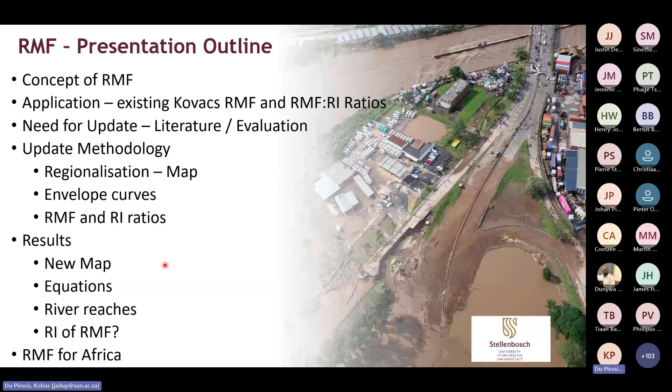So let's start with the intro in terms of the concept. Where does it all come from? The RMF is a realistic estimate of the maximum expected flood peak. Be very sure that you understand that. It is the maximum that you should expect in that region, and there are various regions that we delineated through regionalization. It is an empirical approach, and it's nothing new. It's a method that was developed and introduced by two Frenchmen, Francou and Rodier. They've done it already in the late 60s, where they used 1,200 maximum flood peaks, representing different regions of the world, to test their concept, which we still use today.

Using those maximum flood peaks and the catchments they came from, they developed a family of envelope curves in different hydrologically homogeneous regions, and they plotted these flood peaks against the corresponding catchment areas. They also then made the observation that for catchments larger than typically 100 square kilometers, these regional envelope curves are actually straight lines which converge on a single data point, and that data point represents the total drained land surface area. And in terms of the flow, it relates to the mean annual discharge of the earth.

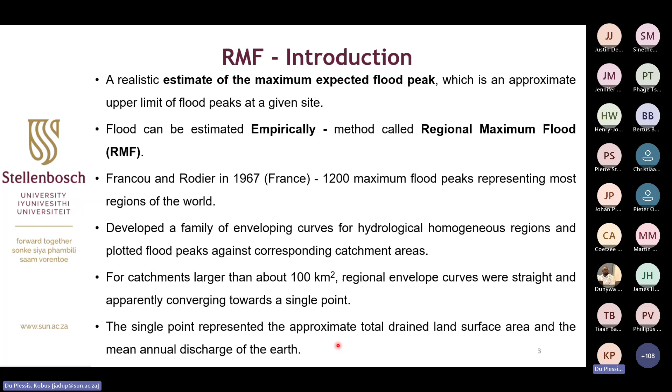I always wonder how someone gets to that specific insight. It is quite remarkable that they've come to this conclusion when they started plotting these data points. And in that process, they derived the very well known, in the RMF environment, so-called Francou-Rodier diagram. I'll spend some time on this just to explain and make it clear to you. But I would like to highlight specifically a couple of things.

On the x-axis, we've got the catchment area and the runoff in cubic meters per second on the y-axis. And in this diagram, we've got three distinct regions. The so-called storm zone or storm region. Then we've got the flood zone or flood region, which is the zone that we are most interested in. And then we've got the transitional zone. And I've mentioned the convergence to a single point. These straight lines, once they've plotted these extreme flood peaks against their catchment areas for the whole world, converge to this point, which is the total drainage area of the earth against the total mean flow of all the river basins on earth. And this relationship is the basis of the RMF.

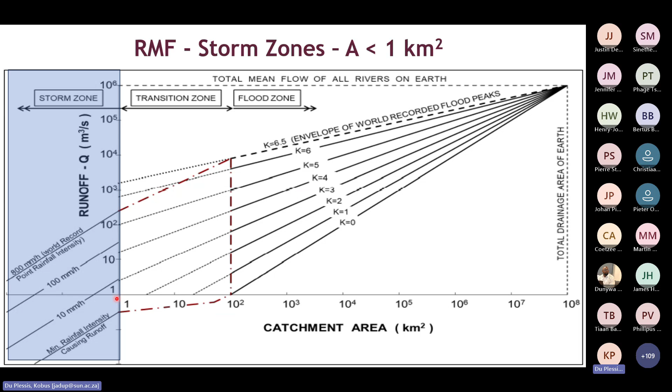But let's go through these in a little bit more detail. So if I look towards the storm zone first, you will see that these are the data points, the runoff that plot against 1 square kilometer. And Francou and Rodier found that the flood peak, the extreme maximum expected flood in different homogeneous regions, is only determined at the 1 square kilometer range by the 15-minute rainfall intensity.

So immediately there's a bit of a rainfall analysis that's required if you would like to complete or update the RMF approach. So on the far left scale of this diagram, you can calculate the maximum expected flood for areas of 1 square kilometer by simply applying Q equals 0.278 multiplied by the 15-minute rainfall intensity, and that's how you end up in the storm zone with specific data points.

If we look towards the flood zone, this is the area where the Francou-Rodier formula has been developed from, and the formula is highlighted there with Q0, the mean annual runoff, A0 being the total drainage area of the earth, and then Q is the flood peak of interest to us. And typically you would like to know, what is this flood peak? That is our regional maximum flood. And that flood peak is associated with an area that you're interested in.

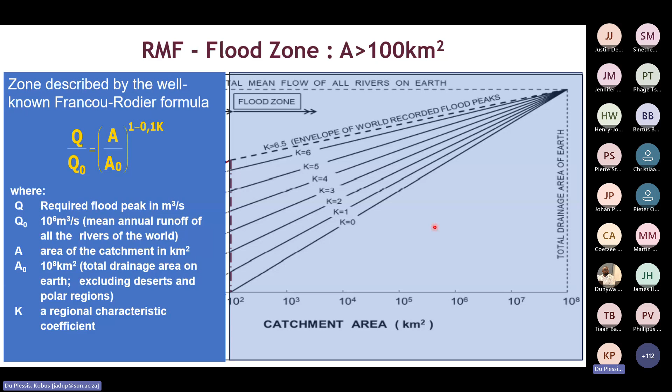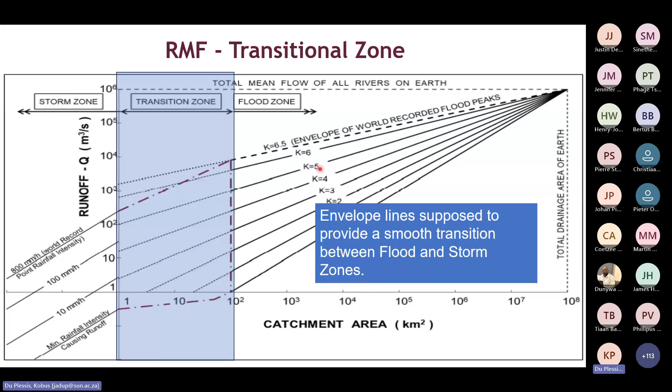Now, the transitional zone: what is the regional maximum flood for catchment areas between 1 square kilometer and a typical value of around 100 square kilometers? That's simply a smooth transition between the data points for the different homogeneous regions in the flood zone and the actual data point for 1 square kilometer using the 15-minute rainfall intensity. And this is how this curve has been compiled, and the curve and relationship that we are using still today. And the trick of all of this is to define these K regions for the homogeneous areas of our country. Now, for South Africa, Kovács has done most of the work for us.

In 1980, he adopted the method for the first time in South Africa, and in 1988 he updated his approach by applying more flood peaks that he observed in Southern Africa and defining different K regions, and in each of these K regions there was an associated K value that can be applied in the Francou-Rodier equation to give us the flood peak. We, of course, as it's an empirical method, will make it very simple, as I will show you just now.

Kovács used 520 sites, of which 354 were in South Africa, and the rest were in our neighboring countries. And he used those flood peaks between 1894 till 1979 to plot them. And again, he found that they align in homogeneous regions as Francou-Rodier found previously.

There are typical published values from people doing this research in the rest of Africa. Typically, we'll find in Madagascar a K value of 5.5 to 6. In the Kalahari in Southern Africa, you'll find K values less than 3. On our Highveld, between 4.5 and 5. And these are then the K values defining the Francou-Rodier equation in what we refer to as our regional maximum flood approach.

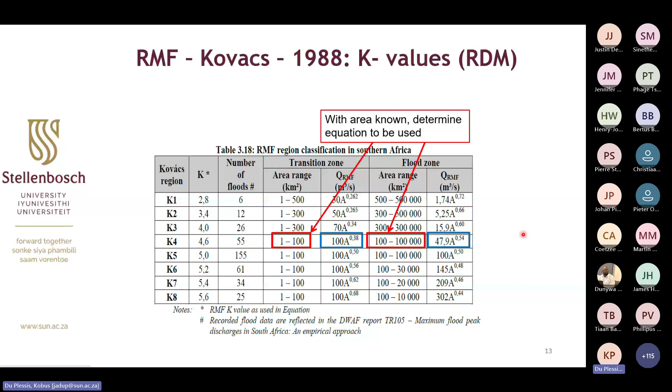He's done this for Southern Africa, and as long as you've got that K value from a regionalized figure, which I've just shown to you, the one in the road drainage manual, the one used by the Department of Water and Sanitation, the only thing that you need to know is the area of your catchment, and the area will dictate which formula you are going to use. And I'll illustrate this in an example just now to make you at ease with how the method is being implemented.

So Kovács also made a couple of comments. He stated that there are two regions in Southern Africa where the actual K value is smaller than the K value of the region which he defined. And he simply did that because there was a lack of data in central Botswana. The K1 region, with an equivalent K value of 2.8, he stated that you actually will find values smaller than the 2.8. And similarly on the west coast of Namibia, it's delineated as region K2 with a K value of 3.4. He's of the opinion it's a little bit smaller, and you can be a little bit less conservative in those areas if you apply the method.

He makes the point, and it's still very valid today, that the RMF is an upper limit for every region, and the K values can be adjusted downwards if runoff characteristics of your particular catchment in that region are lower than the average of the region. Now, let me immediately state that this is something that needs to be done carefully and only by experienced users. And he lists a couple of pointers.

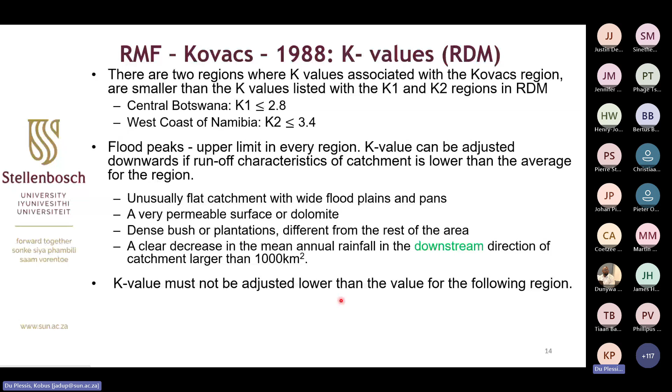He also then stated that the K value is associated, and ladies and gentlemen, this is really very, very important, with the position of the site where you are, not where your catchment area is, but the specific site that you're interested in, wherever that site is, and the K region or the K value associated with the position of that site is what you need to use, not the catchment.

He did say that with very large catchments, where your catchment covered two big K regions, the K value might be calculated proportionally. Be very careful. In my latest research, when we update this, you need to be very experienced to do that. I will request you not to do this just simply from the way that we've derived the K values.

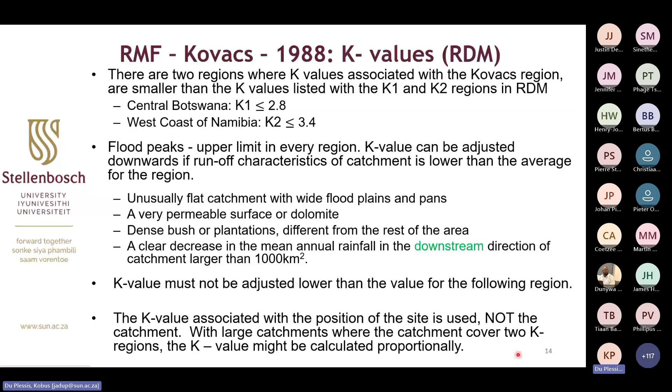So let's look at the application. This is the background. This is where it comes from. I'm still going to use the Kovacs RMF approach, because this is so well used in practice, just to illustrate the implication. So all you need to know really is your site of interest. And of course, you know that.

So just take an example here. We want to know what is the regional maximum flood at our specific data point there. We plot it on the map. I use the Department of Water and Sanitation map, and it plots as 4.6. The K value is 4.6. And now that you've got K equals 4.6, you only need to have the catchment area you're interested in, and that you will have.

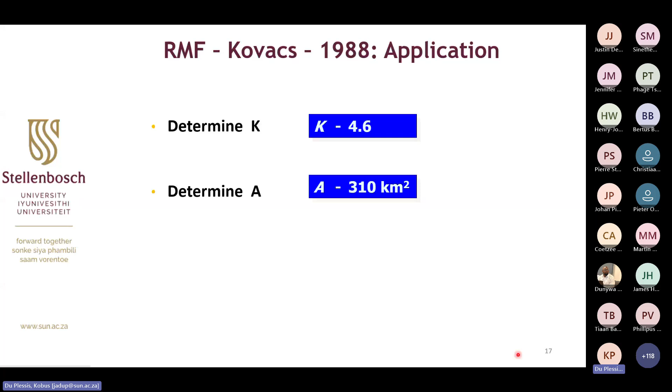In our case, we select a catchment area of 310 square kilometers, just to illustrate the point. And that 310 square kilometers will guide you towards the zone in which you fall in terms of the suite of equations that you can use. So we found that 310 falls in the flood zone. I'll illustrate it just now for you. And once you've identified that, you simply can calculate your flood peak, the regional maximum flood, by using the appropriate equation.

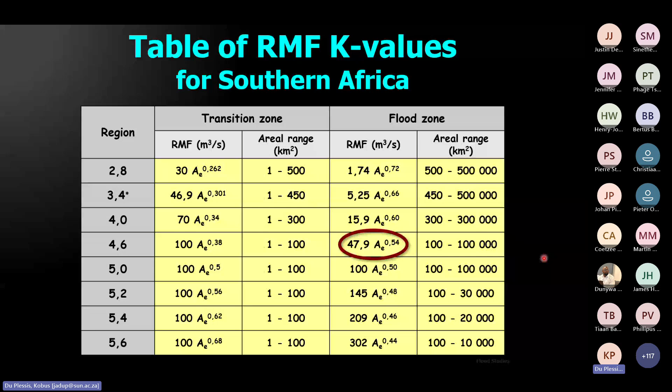So what is the appropriate equation? We are in region 4.6. We know we are in the flood zone. Why? Because our catchment is 310, and in 4.6, 310 falls between the limits of the application range of this equation, which is between 100 and 100,000 square kilometers. And since we know this is our equation that we need to apply. As simple as that. You just read it off from the tables.

Back to our example, substitute our area in the correct equation that we found for the flood zone for that specific K region. And once you substitute that into the equation, Bob's your uncle, you end up with an RMF of 1060 cubic meters per second in this particular example, to illustrate the working thereof.

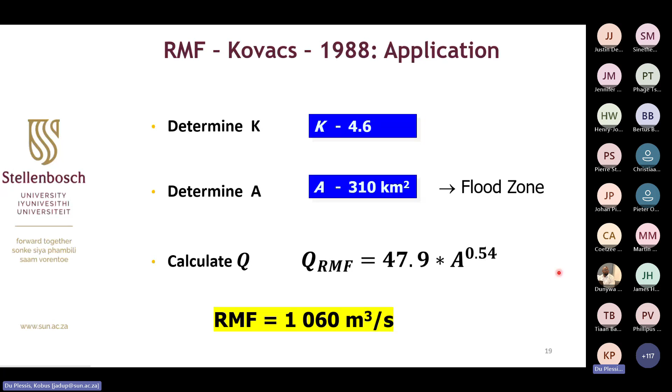So Kovacs also developed ratios, and I'm surprised how many times I've seen these ratios being used. For that, he developed tables that were presented in the road drainage manual, which give us the ratio between the RMF and other return periods. So the only thing that you need to do is multiply your RMF, which is easy to determine, with those ratios to calculate those flood peaks at different recurrence intervals.

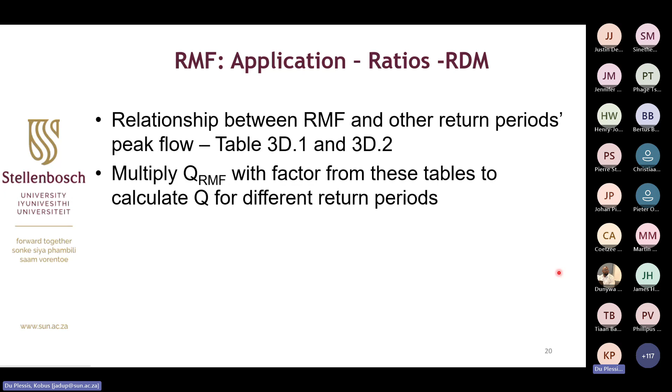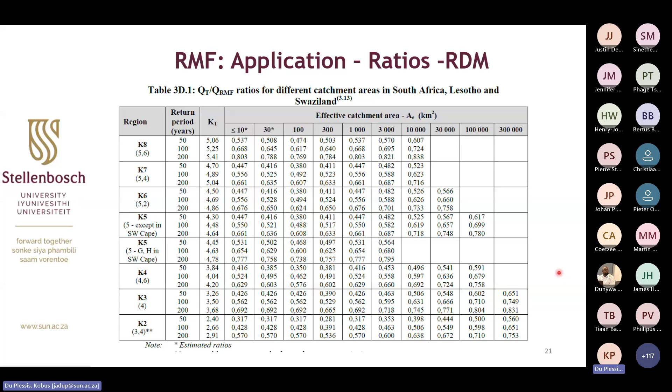If we illustrate just how it works, in this case, let's assume we've got our RMF that's known, and we want to determine the 1 in 100 year flood peak. Then the only thing that we need to do is, we are aware of our catchment area. We know it's 300 odd square kilometers, 310, and for that reason we just simply interpolate between 300 and 1,000 square kilometers. What is that ratio for our 310 square kilometers for the 1 in 100 year recurrence interval?

Interpolate, you'll find that the K value is 0.653 in this case as an example. K is perhaps not a good way of naming this factor, because we are also working with K regions and K factors. This is just the ratio, but nevertheless, you multiply that ratio with the RMF, and you end up with a 1 in 100 year flood peak, 693 cubic meters per second. Very easy.

I think many people do not realize that this is also an upper limit. This is not your 1 in 100 year flood peak that you can use in a design. It is the conservative upper limit in that region derived from the RMF that you should use as a benchmark when you do your analysis, to see whether your more trustworthy methods or other alternative methods are not giving you a result higher than that, and that should raise red flags for you. That's the purpose of these ratios.

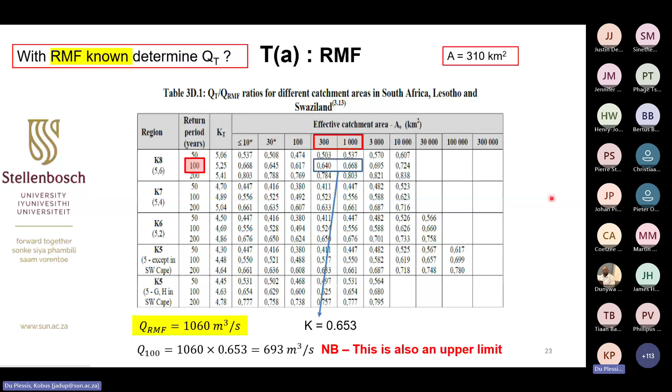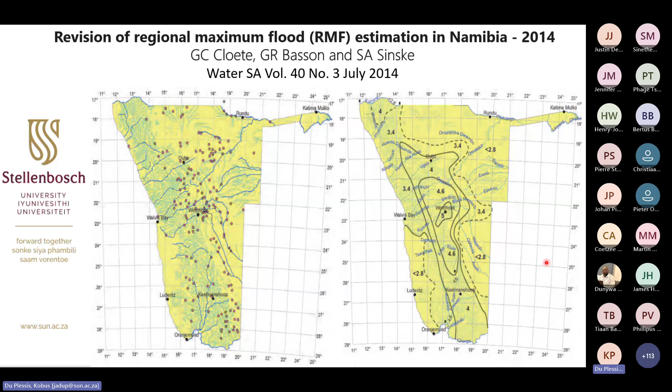In our neighbors, Dr. Gert Cloete, in a related study where they looked at paleo floods, they looked at the flood peaks in Namibia, and as a consequence of converting the water levels to paleo floods, they also looked into actually updating the RMF for Namibia, which was done in 2014. And these were also published. So we've got similar maps for Namibia, which is very useful for us.

All right, so this is the application of the RMF, the theory behind it, straightforward, very easy to use. So why bother? Why not just keep using that? Why the need for an update, which we started doing in 2021? So there are quite a number of reasons. From the theory or literature, I must say, Pegram and Parak have indicated that the RMF is a very robust and simple method of estimating the maximum flood at a specific site.

Very good, they say. But then there were also people like Prof. Andre Görgens, who claimed that in 1988 there were significant floods that might have overstepped the RMF as it was developed by Kovacs and updated in 1988. And he suggests that we need to look at that. Parak also stated that he doesn't feel comfortable because the RMF doesn't give us a clear design flood peak, which is of course true.

Further, Prof. Görgens stated that statistically speaking, the method used to determine the Kovacs ratios was really very simple. And he said that you'll probably have to look very closely at these recurrence intervals, and there might be a need to scale them down. Prof. Fanie van Vuuren published work stating that the Kovacs procedures of '88 should be revised to include all the additional data that we do have available, and to have a relook at these envelope curves.

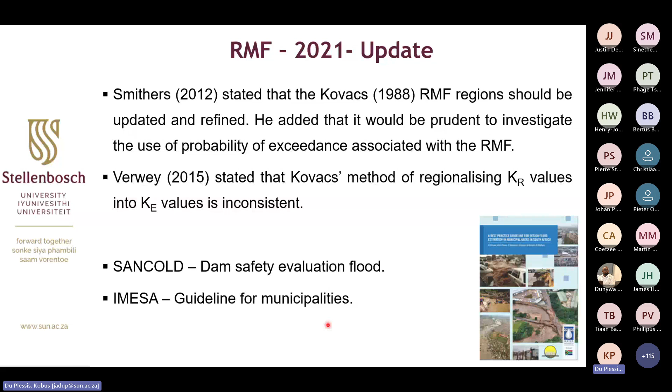Still, the RMF has been used in dam safety evaluation floods, and recently the Institute of Municipal Engineering of Southern Africa compiled a guideline for best practice for design flood estimations for municipalities. And in that guideline, the authors get to the conclusion that in disaster management and risk assessments, you really need to look towards the RMF and put it through your stormwater system to get a clear indication of what you can expect. Given all of these, it was clear that we need to update this.

So what we've done is to first look at what is happening today with the updated data. So we use the RMF as it was updated in 1988 by Kovacs, and we use 494 new flood peaks from data that we obtained from the Department of Water and Sanitation data set. And we try to figure out whether there were actually flood peaks that occurred after 1988, as various authors have stated before, to see whether they are actually exceeding the defined curves. And to do that, we simply plot the new flood peaks against the old Kovacs envelope curves and assess the situation.

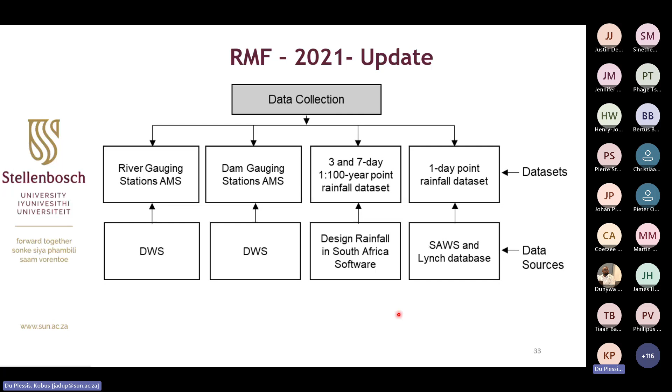So how does our data look like? In terms of the river and dam data, this is well distributed over South Africa. The average record length was in the order of 51 years. We used 178 dam stations and 316 river flow stations to compile our data set.

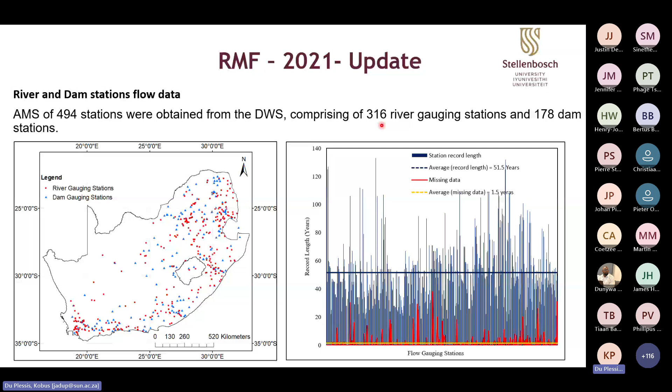In terms of our 3 and 7 day rainfall data, we use this because in the regionalization, you need a couple of guiding principles. And Prof. Will Alexander stated that he observed that extreme flood peaks are typically the results of prolonged and widespread extreme rainfall events, such as the 7 day, 1 in 100 year rainfall events.

And for that purpose, we derived a rainfall isohyet map using the 7 day, 100 year recurrence interval data, which we obtain from the software. So in this data set, our average record length of our rainfall stations was about 69 years, and we've obtained a fairly good set of data.

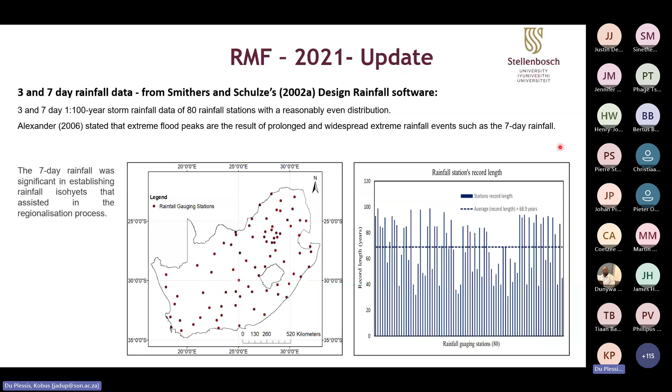And thirdly, in terms of our data sets, is that 15-minute rainfall data that we require to determine the flood peak at 1 square kilometer, as what I've highlighted right at the beginning. And for that purpose, we use 69 gauging stations from SAWS and 35 from the Lynch data set. And we determine the highest value in each region, 1 day rainfall, and we use the Smithers and Schulze scaling factors to convert 1 day rainfall to 15-minute rainfall.

And in doing that, we then were able to convert the daily rainfall to flood peak for 1 square kilometer in the storm zone. For this data set, we use very good data. The average record length was 114 years. So this was our data sets.

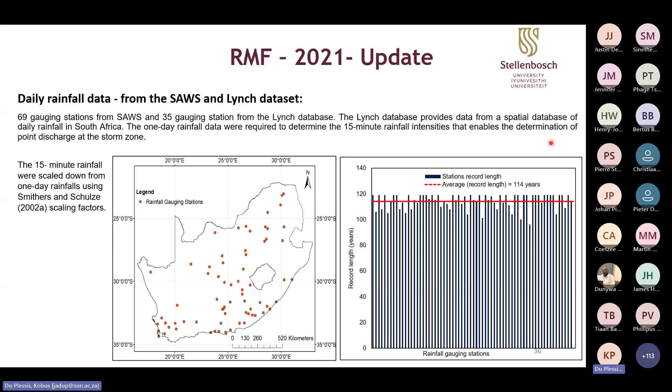In terms of the process in the methodology that we use, just a brief overview on that. So we start off by using all of these flood peaks with their associated catchment area. And with that information at all these different sites, we were able to calculate K value using the Francou-Rodier equation, where the S stands for the station. So now we use all of those flood peaks at our disposal.

We plot them in GIS, knowing the position, and we plot the station K values as derived from the Francou-Rodier equation. Once we've plotted those station K values, we created station isolines, KS isolines, and produced from those isolines for the whole of South Africa a regional map that gives us a visual interpretation of where what K values in terms of the stations occur, and we group them together in regions with more or less similar KS values.

We evaluate these KS values against the envelope that we've drawn from these groups of KS values against the actual flood peaks that we observed. I'll explain this again a little bit later on, but in our methodology that we followed this time, we were very aware that in our group of river flow and dam data stations, there are different record lengths. And we were not sure whether it's reasonable to put all of this data in one pool.

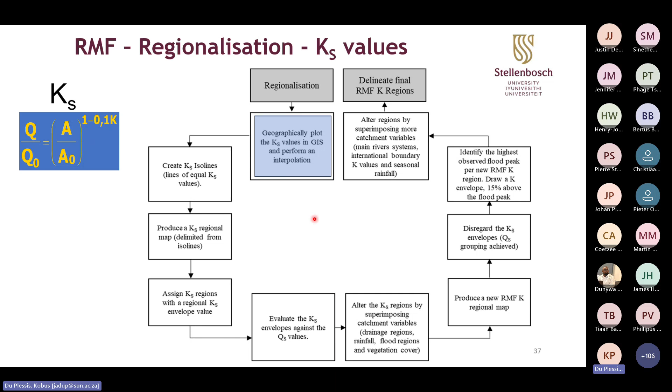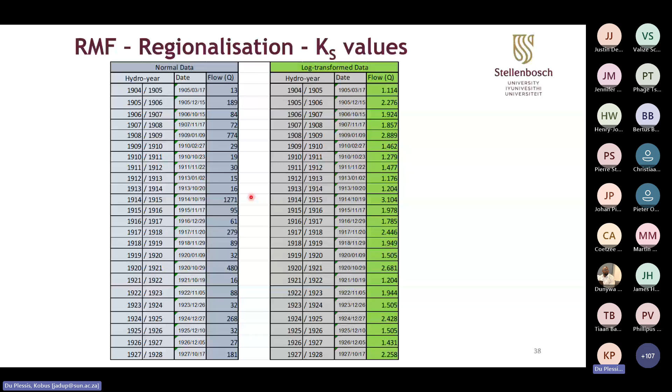So how does it work in practice? We start off calculating this KS value. So here you've got your annual maximum series of a particular station. In this case, if you look, there's a log transformation thereof. The highest flood peak was 1271 in this particular case. We take that highest flood peak in our data record from the annual maximum series for all the stations. We list them, and in this case we work with one particular station as an example, and we calculate for that station, the observed flood peak was 1271 as what I've just shown to you.

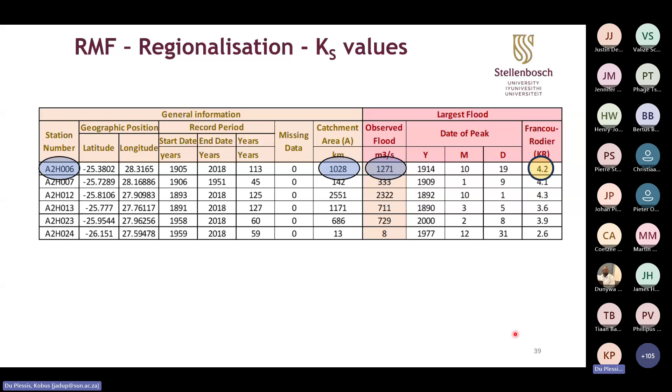We know what the catchment area is, and for that particular flood peak and area, we can use the Francou-Rodier equation to calculate the actual Francou-Rodier K value. And this is the K values that we start off in all our calculations. Then we apply that safety factor that I explained to you. We take the observed flood peak, we add a safety factor delta Q.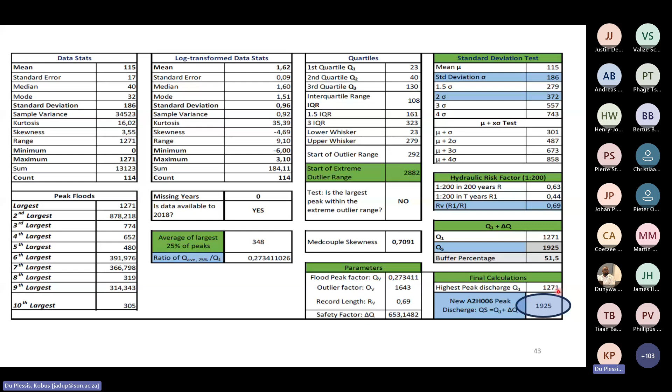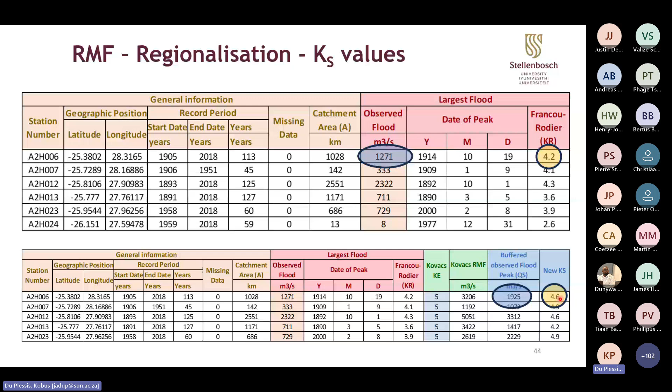The original actual highest observed flood peak was 1271 for this particular station. After our safety factor, it was 1925, and we use that 1925 to recalculate the K value. It used to be 4.2, now it's 4.6, and then we start our regionalization. So we built in a bit of a safety factor just for the purpose of regionalization, not to finalize our end product.

So just in a couple of words in terms of summary, the procedure that we follow: we use a QS value, which includes a safety factor, to calculate a station K value through the Francou-Rodier equation. We regionalize those. We do that by drawing isolines for those KS values, plot them in GIS, draw those points with similar KS values, see whether we can group them together, and an envelope curve was then assigned to one such particular region, and we compare that to our actual values to see that all of them fall underneath this upper boundary line or envelope curve that we've drawn, and this is how we've done our regionalizations.

We went through a couple of iterations to do that. I'm not going to repeat this again, but some of the guiding principles that we've used for regionalization have been highlighted here for you. So we superimpose this on our KS isolines. So KS is where we started off our equation from our observed flood peak and area, calculating the K value through the Francou-Rodier equation, and drawing isolines. That's where we started. And then we superimposed on it various contributing factors.

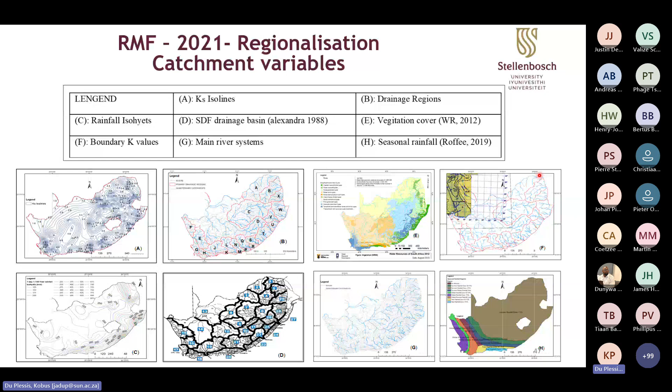So we'll use all of these different input parameters to try and get as good as possible a regionalization of our K regions. As with Kovacs, we identified that within a homogeneous region, after this whole regionalization process, for certain main rivers there are K values which are not similar to the region in which they were classified or grouped. And that's well known that it can happen. You must just be aware thereof and make sure that you do understand it, and we will provide a list to assist you in that. Because for that particular reach, there's a different K value that can be applied in the Francou-Rodier equation.

And then, after we've done this, we evaluate the homogeneity using the coefficient of variation to make sure that we grouped in an appropriate way. So once we've got this grouping done, we need to develop our envelope curves, come up with a formula. So there are two that we need to do.

We need to determine the flood zone envelope curve. That is the one that we are most interested in. And then we need to do our transitional curve. But before we can do the transitional curve, we need to understand what is the storm zone value.

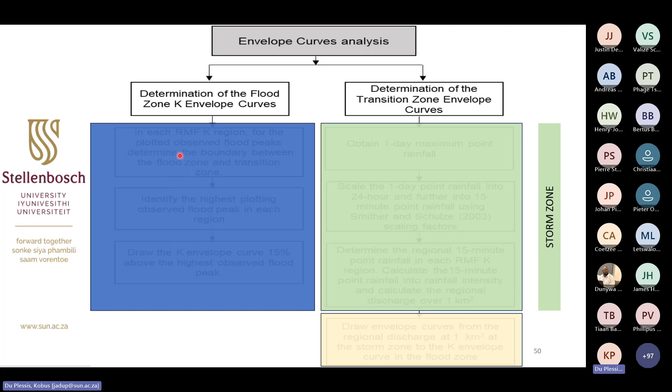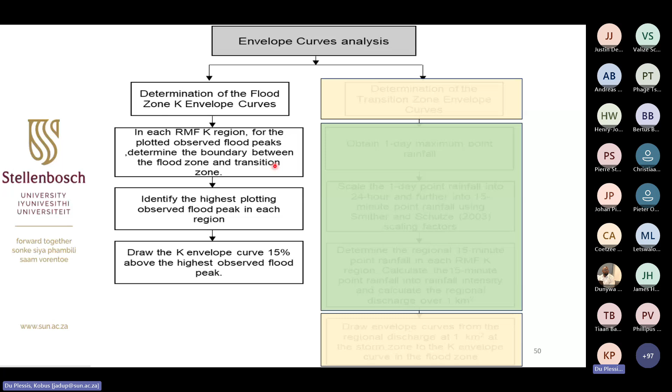If we just look at the flood zone envelope curve, now that you've got your groupings in each region for the plotted observed flood peaks, we determine the boundary between the flood zone and the transitional zone. Is it 100 square kilometers, 200 square kilometers? Where does it change this pattern or this linearity? You can only observe that when you plot the data. I'll show you a little bit later on.

And then we identify within this grouping the highest plotted observed flood peak, and we draw our linear relationship adhering to the Francou-Rodier equation 15% above this value. This is how we determine our envelope curve formula in the flood zone, exactly the way that Kovacs has done it, using the Francou-Rodier principle.

To determine the transitional zone, of course, we first need to look at the storm zone. And in the storm zone, we take the one-day maximum point rainfall from those stations that we've selected. We scale them down using the Smithers and Schulze scaling factors. It's not actual 15-minute rainfall data. We don't have adequate data to do that, but we found these to be appropriate, and we convert this 15-minute point rainfall using that simple equation to determine the 1 square kilometer flood peak, and as such we do have a point on our storm zone side of our graph.

And then, of course, the link between the storm zone and the flood zone envelope curve is just a straight line to get a smooth transition between those two.

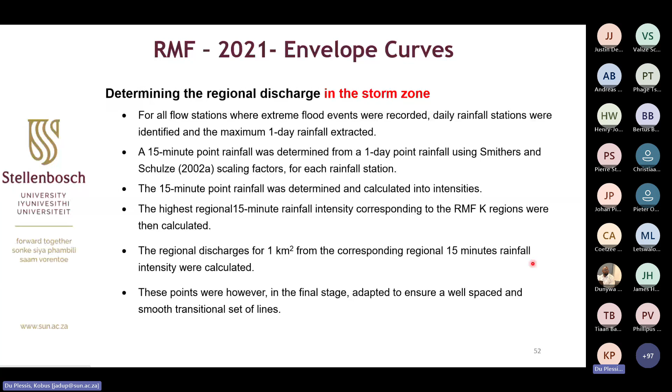Right at the end, when we draw the different envelope curves in the particular storm zone, to avoid them converging on a single point, we just space them typically through the whole range of K regions, as I will illustrate with a graph just now. So what we've got now is a single data point based on the 15-minute rainfall, and in that context, we start in our storm zone on our graph with that single data point.

Then in the flood zone, I've explained how we draw the 15% envelope line above all the grouped data points. And in the graph, if you plot them, these are all the data points. The blue ones are the dam stations. The red ones are the river stations, plotting simply the catchment area against the discharge. And due to Francou-Rodier's equation, we know that this is a linear relationship.

We've calculated this data point. These are all stations that fall in what we consider a homogeneous region through the regionalization process. And based on that, we could draw our envelope curves, and that line's been drawn 15% higher than the highest value in this particular grouping.

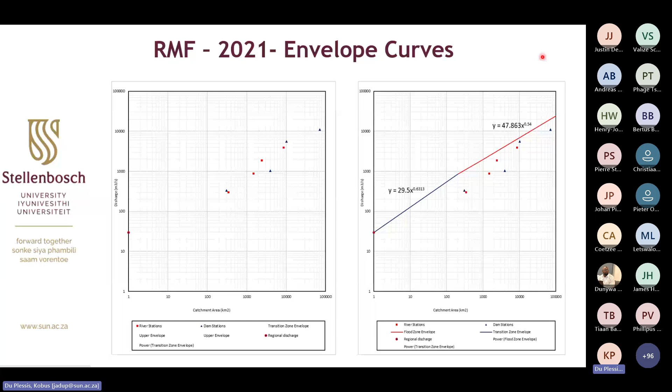And using the Francou-Rodier equation, we can put values to our actual envelope curve, which we then use in our derivation of the appropriate formulas for the different K regions. So that is how we've done it, and I'll show the results to you very soon.

But there was still the issue of return periods of the RMF. To address that, the literature tells us that Kovacs said that the RMF does have a recurrence interval in the order of 1 in 200 years. We were not sure whether this is true.

So what we've done is we've taken all our stations' annual maximum series, and we calculate the different recurrence interval flood peaks. And to do that, we first need to make an appropriate selection of the distribution, whether it's General Extreme Value, Log-Pearson Type 3, or whatever the case might be.

We went through that evaluation process using the Cunnane plotting position of the data points, decide on a probability distribution, and based on that probability distribution, we calculate the different flood peaks for the different recurrence intervals, and then determine the ratios between those, which I'll illustrate just now.

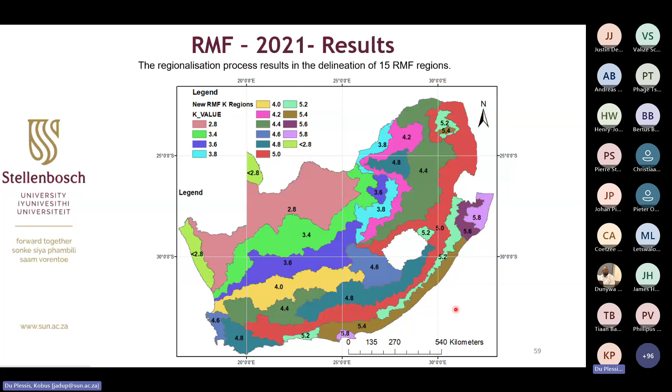So let's look at the results, ladies and gentlemen, of this methodology that we've applied. So here it is. What we found is that this is our new RMF map with the different K values being highlighted here. And the first thing that should strike you if you see this for the first time and you are used to the Kovacs approach is that we do have in the new approach quite a significant number of additional regions.

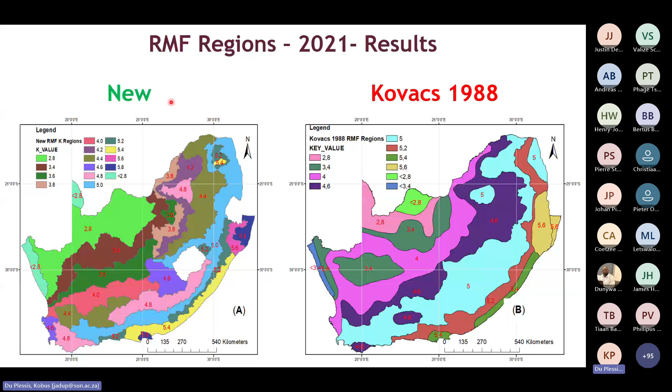So this is the 1988 K regions. This is our new map that we've come up with. In our new approach, we use 15 regions. Kovacs originally used 10 regions. And the simple reason why we could have done this is that we've got more data. We found that the new regions are more localized because of our better distribution of data points.

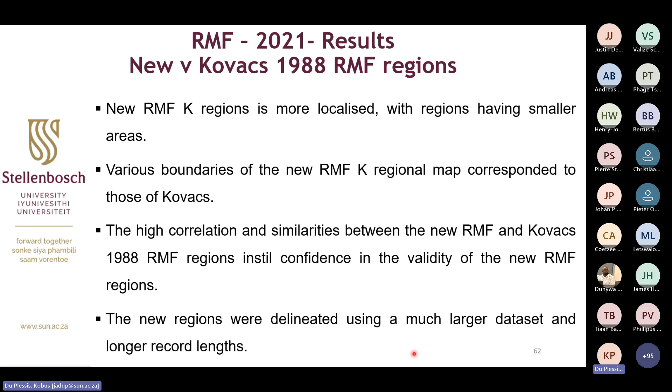Various boundaries of what was proposed by Kovacs in its original application of the method for South Africa correspond with our regions, telling us that we have certainly not done something wrong in our process, and that they do talk to each other, but it's just improved. And this high correlation and similarity give us quite good confidence in the approach that we used. And in many of these cases, as I will show just now, the formulas stay the same, but we will be able to provide more smaller K regions, simply because we've got more data.

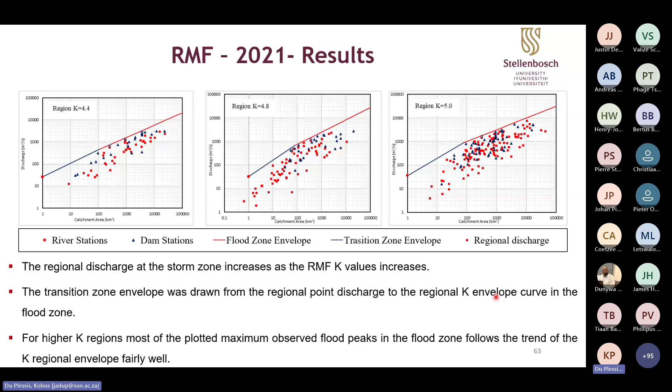So these are typically the results. For each region, we've plotted the data points to make sure that we understand how it works. It all makes sense in our K regions. The regional discharge at the storm zone increases as the K values increase. So you will see that here it's 10, 20, 15 cubic meters per second for K equals 4.4; for K equals 4.8, at 1 square kilometer, it's 10, 20, 30, it's higher, and in 5, it's even higher, 10, 20, 30, almost 40. So it makes sense. The plotting of the data points within those regions follows the same tendency. And so we were fairly happy with those visual interpretations.

It is, however, important, and this is a big difference, that in the storm zone, for the regionalized 1 square kilometer discharge, in the new RMF envelope curves, these values were significantly lower than those used by Kovacs for the very small 1 square kilometer catchments. But in all the data that we could put our hands on in terms of actual observed flood peaks, we find that Kovacs was significantly higher than the observed flood peaks. So we feel confident that Kovacs was actually quite high, and the approach that we are using gives us a better indication. I just want to prove this.

It's a bit of a busy diagram, but just think of the tail end. This is the 1 square kilometer side of our Francou-Rodier diagram, our flood peaks versus catchment areas. The solid lines are the old Kovacs envelope curves in this transitional zone between the 1 square kilometer and wherever the boundary is for the flood zone. The dotted lines are the new ones that we've used. And what was interesting for us is that in the Kovacs case, they converged to a single point here somewhere, which was quite odd. But we've spaced them to make more sense of it.

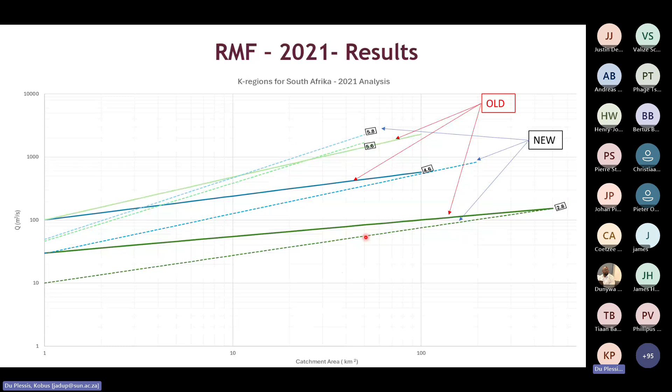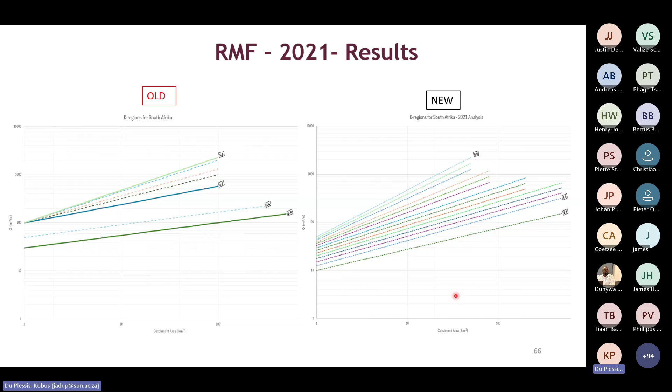Our actual values fitted our data significantly better, even though they're lower than what Kovacs came up with. If you plot them all using the equations, you can see in the old scenario in the transitional zone, fairly high values in this 1 square kilometer area. We've spaced them equally over our range of K regions, giving us a more logical and sensible result.

I've mentioned earlier that we also found that in certain K regions, specific river reaches exhibit a different K value. And indeed, in certain areas, and we've listed them in our publication, even though that river reach in the Sand is not in a 4.6 region, we found that 4.6 is a more appropriate value to be applied.

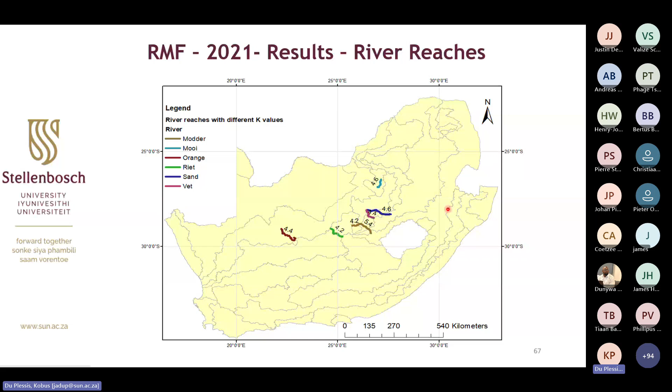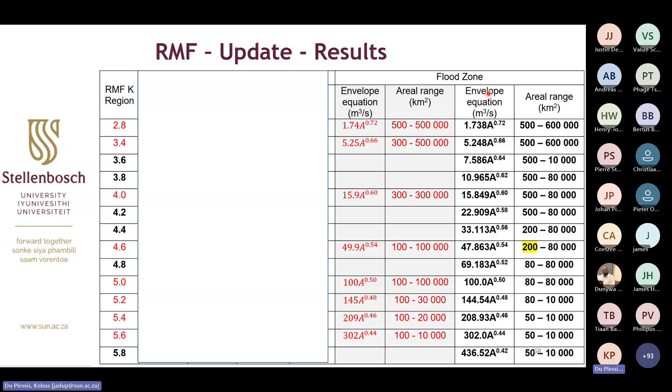If we look towards the transitional zone, there are bigger differences. Again, these small changes, they are really to the second decimal or something like that. That's the only reason I've highlighted them. But we can come up with significantly more K regions, and we come up with the formulas to assist you to do the calculations.

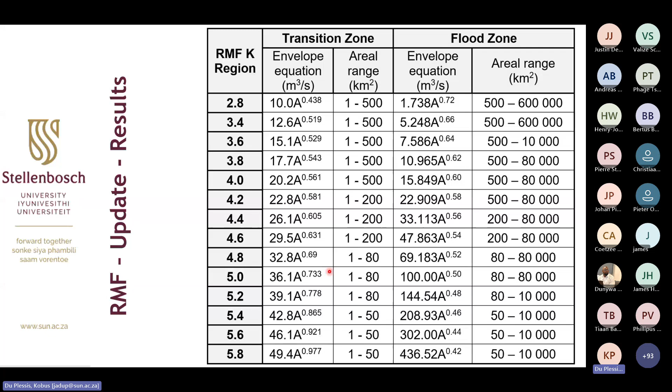Summarized, these are the final values that should now replace the tables that we have used up until now in the road drainage manuals. These are considered out of date, and these are the newest and applicable as published in the SAICE paper with those small changes that I've just highlighted. If you plot them on a single graph, the Francou-Rodier diagram, they are well spaced and do make sense visually. It's a matter of which stations fall into which region at the time.

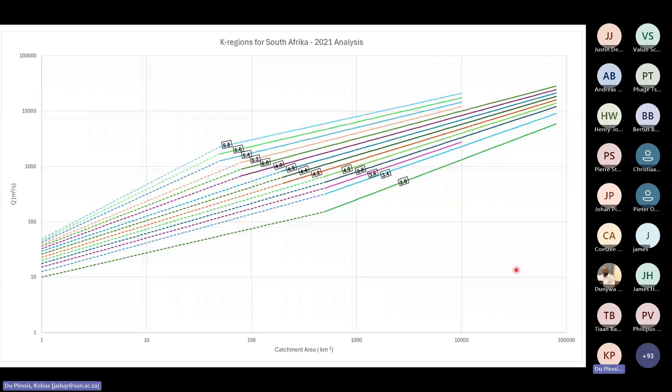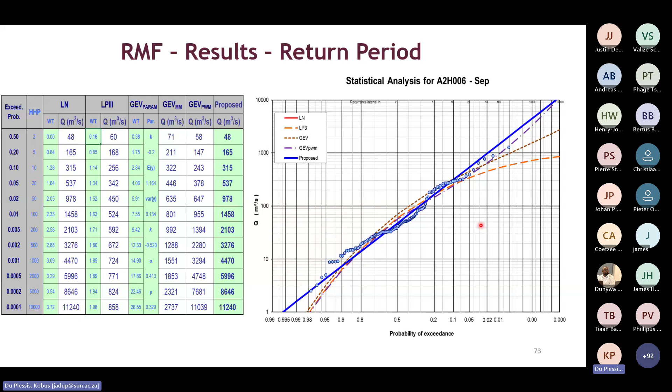In terms of the return period, how to deal with that, ladies and gentlemen, getting to the end of the presentation. So what is the return period? So we went through this whole process, look towards the different probabilities, distribution fittings, make an appropriate selection, calculate for different recurrence intervals the actual flood peak, calculate the ratio between the RMF and that flood peak and present those.

And the results were, as expected, quite varied over a wide range, but far from the 1 in 200 recurrence interval as was suggested by Kovács. There was a significant amount. These are the number of stations where we found a recurrence interval of between 200 and 500 for the RMF, but you can see it stretched even to quite big numbers, which needs to be used with care.

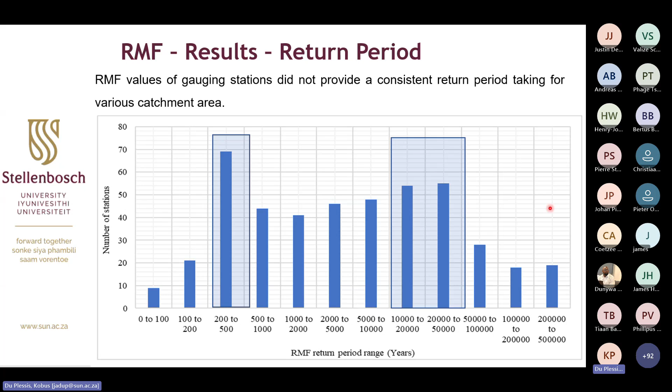So what do we say if we look towards all of these? In our publication, we said the best guesstimate that we can do here is use an exceedance probability and use the median value. And for us, we would say that the RMF seems to be in South Africa typically in the order of the 1 in 5,000 year recurrence interval, which is sort of accepted by many of the people working in this field.

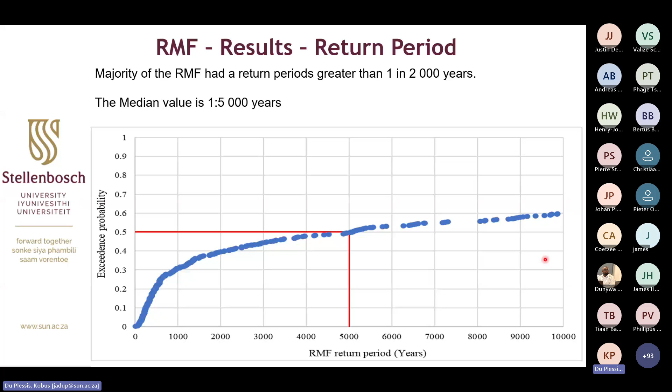So with that being done, summarizing all of this, a site location in a given region is characterized by that K region, and you should use that envelope curve and the formula associated with it to calculate your regional maximum flood. For sites located on or about regional boundaries, which can happen, you can consider using the average K value, or where you are really confident with your particular catchment characteristics, you can use the higher of the two values.

Calculate the RMF using the identified region with the correct equation for the correct zone by simply substituting the area in that specific equation, as simple as that. And then keep in mind that there are several rivers where you need to be careful. I didn't show you a lot about the ratios, but it's work in progress. We've got some research on the go with that.

But as it stands at the moment, in terms of the ratios that have been published in the Road Drainage Manual, ladies and gentlemen, please do not use those. They are significantly out. We hope that we will come up with a better estimate, because it is useful, but just remember, it is not the design 1 in 200 year flood that you can derive that way, but it's the upper limit.

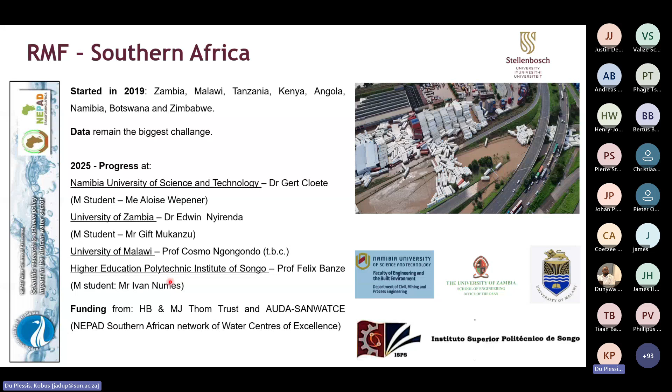There are published data that we could have collated and that we tried to use. They're still quite sketchy and untested by us, but as we progress, we hope that we would be able to fill in for Mozambique, for Malawi, Zambia, and at least for Namibia, an updated version. I am in doubt if we will get anything from Botswana. I've tried so hard, but it's just a mission to try and get to that.